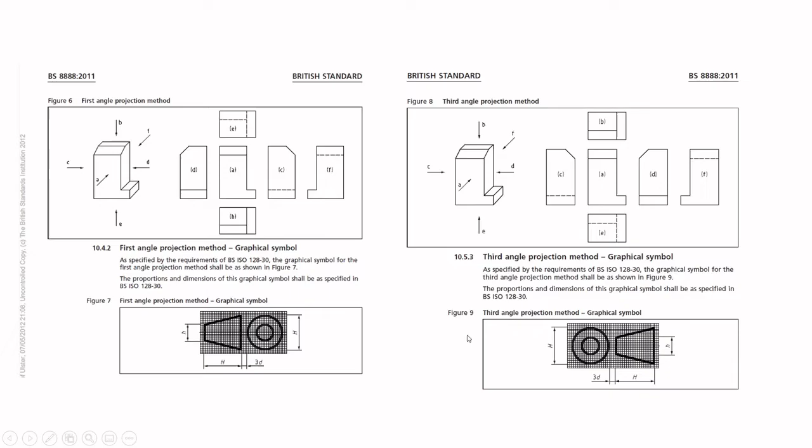So first would be, if you go back - so first and third. In fact, sorry, that is first angle, my mistake. So that is first angle projection. So not an orthographic drawing, but still a technical working drawing. The thing that is missing from there to make it an orthographic drawing is having measurements on there.

So what are working drawings in engineering and in designing and in architecture? Because they're all very, very similar. The whole point of working or technical drawings is to just convey information, and it's never going to just be one particular page of drawings. They're probably going to be 4 or 5 different sheets of all the key information you're going to find on there. Typically they'll include mainly 2D drawings. You may get a 3D projection on there a little bit, but it's mainly going to be the 2D side of things.

So what you're going to find on there are things like orthographic projection, key measurements you might have on there, your sectional views, your parts lists, your bills of material, which tells you what materials will be on there. And then when you might have the 3D one will be the exploded drawing - picture that like when you get a piece of IKEA furniture, and it shows you all the parts, all in line but all exploded outwards, so you can see how it all goes together.

Now remember what I said is that these all come under working technical drawings, and you're probably going to have multiple different ones in a set.

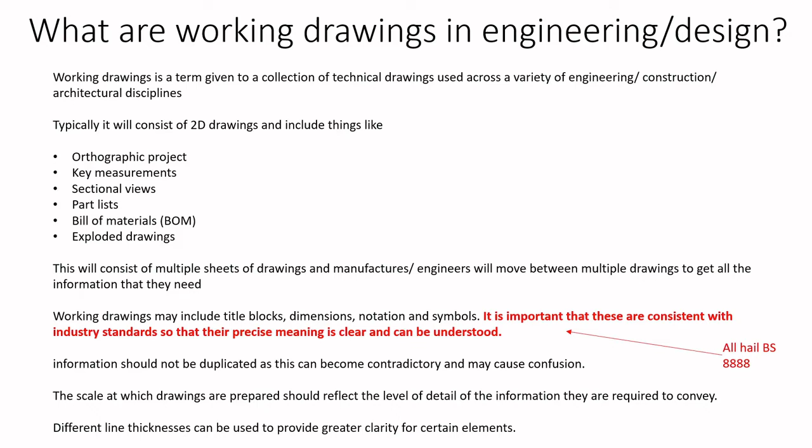A couple of other examples: section views, which we've already mentioned, with the cross hatching - that tells you it's been cut in half, letting you see any internal parts of an object. Exploded drawings, like IKEA furniture instructions, where everything lines back up again nice and easy.

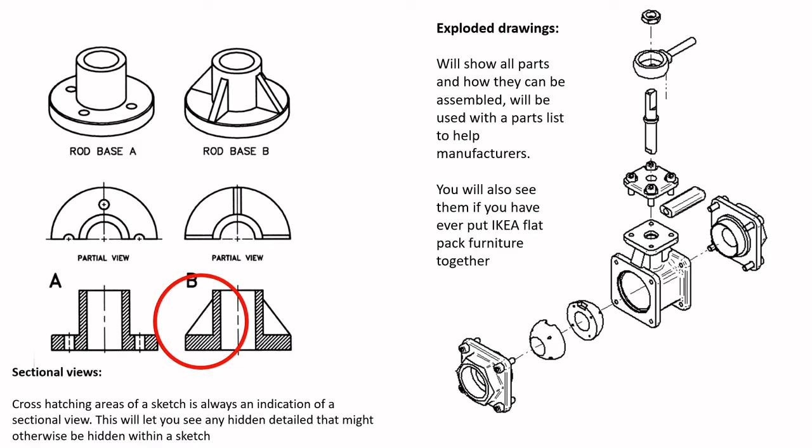Nowadays these are all generated relatively easily by CAD software. As I said before, you originally had to do this by hand and it would take forever.

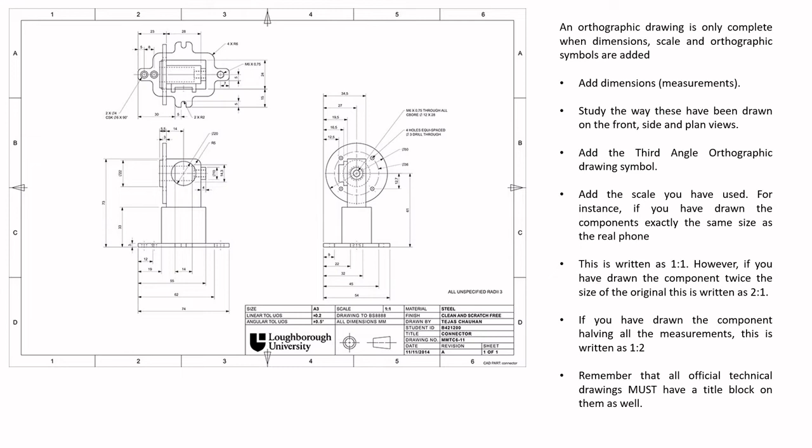So here's what you'd call a proper orthographic sketch or working drawing. This has a title block, done to British Standard 8888. You've got your third angle projection, scale, sizes, materials, finishes, the name and everything on there. You've got your border with all specific sizes, along with all key measurements, and everything in line. This is exactly what you'd expect to see on a technical drawing as part of a collection of other technical drawings.

So that is the technical drawing side of things. Then there are other kinds of sketching, which still have places in the design and engineering world.

It's just that you might not show freehand sketches to a client, because that might just be how I communicate to the person in the office with me, how you communicate to another student, or how you communicate to me.

So those can be fun things like freehand sketching, which are really good for quick ideas - no specialist equipment, just a piece of paper, notepad, pencil, dead easy. To get really good at these takes a lot of practice, particularly for a fine art style. Not used so much to communicate ideas to clients, but for communicating to a fellow designer, absolutely.

You've got isometric drawing, drawn at 30 degrees. I'm sure we've all seen isometric grid paper before - to begin with, when learning, that's what you use, but eventually you remove the grid paper. Typically, in 3D drawing or sketching terms, this is the style most commonly used.

The other one people know about in 3D drawing is oblique, where you draw a face on and drag it backwards. That's probably like when you first learned to draw in 3D - you'd draw a square, then another square just to the side at the back, and draw the lines up. It's still 3D, but considered more of a primary school style of drawing. You wouldn't really use that in industry - you'd probably just be doing isometric sketching.

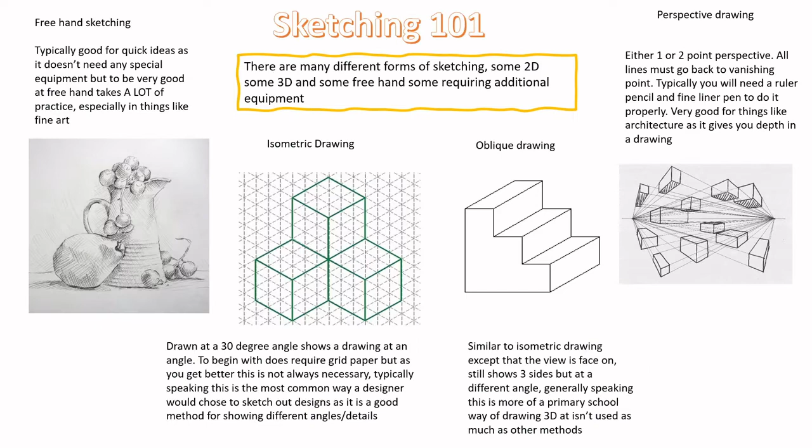And then texture rendering, particularly using things like architecture, because it will let you convey materials on buildings and those sorts of things, and it just becomes like drawing in grains, drawing in brickwork and that type of thing.

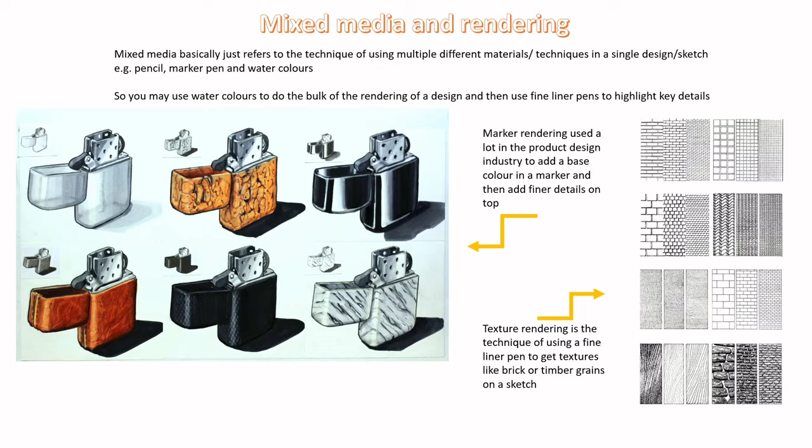So, design reports. We've covered technical drawing and sketching and that sort of thing, but sometimes you need to communicate to shareholders, to bosses, to whoever it may be. This is where you have to do a design report, and it's kind of similar to how you do your coursework, to be honest.

Essentially this is a record of a project that is left after the project's finished. So you've had a client, you've done your project, you've come up with technical drawings, you came up with the idea, you've produced the finished thing, it's been paid for, it's got off production, done. But what the evidence of that at the end of it all will be is the project report that's written at the end. Typically it's split into three parts.

It'll start with an executive summary that's basically summarising the whole design, the whole project. Section 2 will introduce and explain the design problem, the clients, the brief, that sort of thing. And then section 3 will be known as your conclusion - it basically explains why you chose any designs that you chose, any problems you faced and how you overcame them, as you compare it to your specification, your brief, and how it might be improved.

So it's kind of got some similarities to how you do your coursework, which is why it's laid out the way it is. But it's just a very, very wordy document to show evidence of what they've done.

So, graphs, tables, and charts. This is if you're trying to convey some sort of data to people - numbers of some kind. There's loads of different examples that you might do. We've got bar charts and histograms - I'm hoping all of these are fairly familiar to you, as we have covered bar charts and histograms in the math sections already. It's worth pointing out as well, they do like to use this for particularly things like anthropometric data, to convey sizes and measurements, that sort of thing.

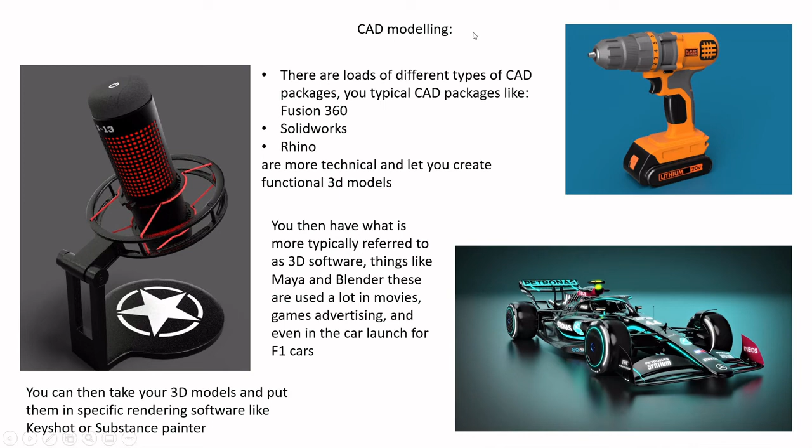3D modeling is a really good way of basically communicating ideas in a more visual, hands-on approach. The idea being, you can have a sketch, but sometimes people can't always visualize it. So having a 3D model makes it a lot easier to communicate your ideas in a 3D way, because you can sort of feel models, have a look at different angles, those sort of things.

Modeling material can vary from things like cardboard to modeling foam. Modeling foam is used a lot because if you get the denser stuff, you can cut and sand it and paint it to look like the real thing. In fact, a lot of props in movies and those sorts of things are made out of modeling foam, so something that looks super heavy, you pick it up and it weighs like nothing.

And then obviously you've got 3D printing nowadays, where it's called rapid prototyping. It's not really rapid because sometimes it can take 12 hours to print something, but it's still a really good way of communicating something to another designer, a client, or a focus group.

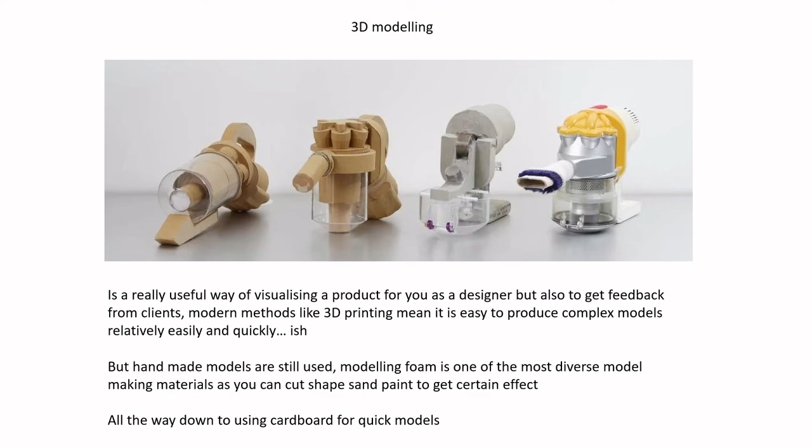You also have things like annotations. So how do you annotate your designs? Again, this is probably going to be before you show things to a client, because this is how you're going to communicate to your bosses, your fellow colleagues, those sorts of things, talking about materials, manufacturing, positives, negatives, improvements, those sorts of things.

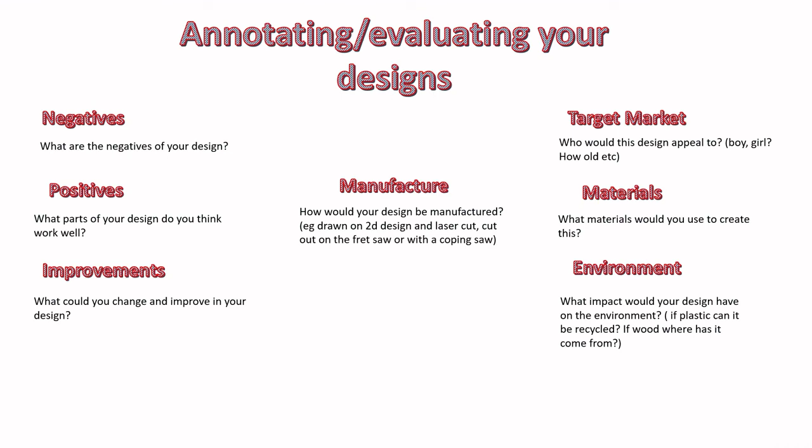So you can sort of see the kind of thing. You have your design, you annotate coming off it, so you can think through it. Basically this is your thought process: here's the design, here's what I'm thinking. As you get further down the process, you'll start answering these questions yourself more, and you start removing the annotations, because you'll just have the final design, and all this eventually will be conveyed in your technical drawings.